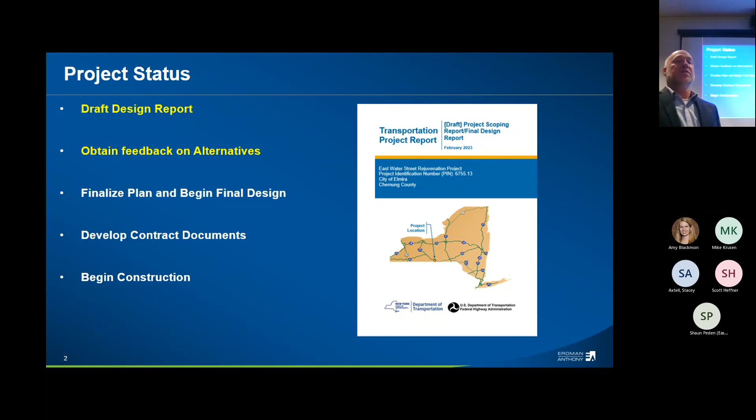So what are our project objectives? What do we want to do as part of it? A key part of that design report and that preliminary design is to improve the pedestrian facilities and improve the safety of pedestrian, bicycle, and motor vehicle traffic. Obviously safety is a big thing with everything that we look at, and the city wants to make sure it's a safe corridor for everyone that uses it.

Improve the condition of traffic control devices, signs, pavement markings. Again, that goes into the safety of it, how we want to protect that roadway for everyone, and make it more of a complete street for everyone that uses it.

Improve the landscaping and aesthetics of the corridor, and continue that community identity we have from West Water Street, from the cultural connector on Main Street. So all those different projects kind of make a cohesive look throughout the city. And then provide a pavement surface that increases the service life and rideability of East Water.

Over the years, it just gets to a point where you can't just do Band-Aids to the road anymore. You really have to do a full depth. So we're looking at what the different options are for the pavement, but we definitely want to make it long lasting, kind of get in and get out and not have to go back there for a while, other than just routine maintenance type activities.

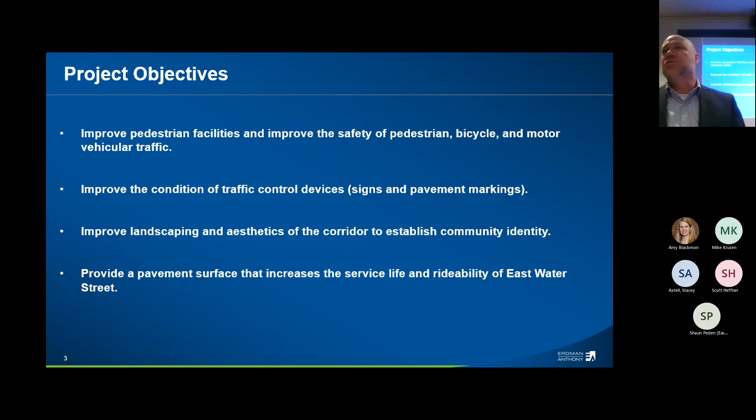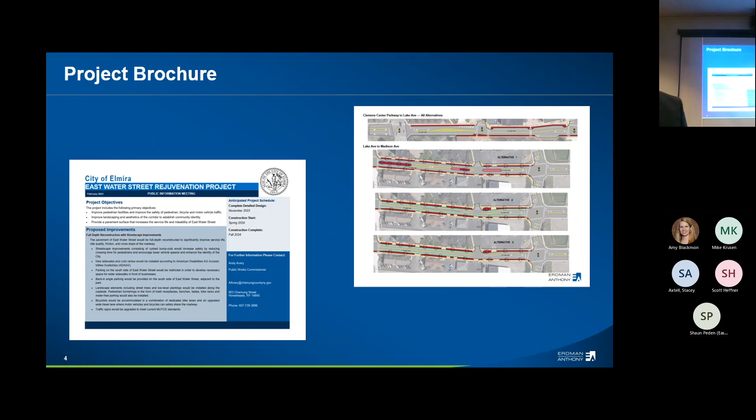So there's a project brochure. I don't know if everybody's grabbed it, but I invite you to grab those. I'll admit, as much quality control as we have, sometimes there's some gaps, and we did see that there's Lake Ave there instead of Lake Street, so I apologize for that. But there's a lot of good information, questions you can ask later. A lot of the facts of the project are included, as well as the three different alternatives that we're looking at.

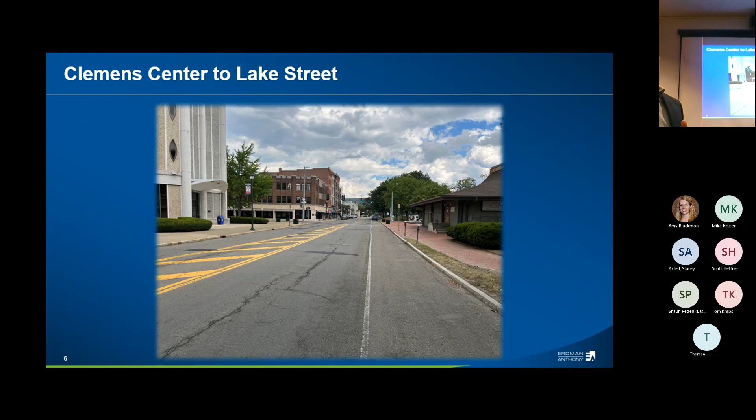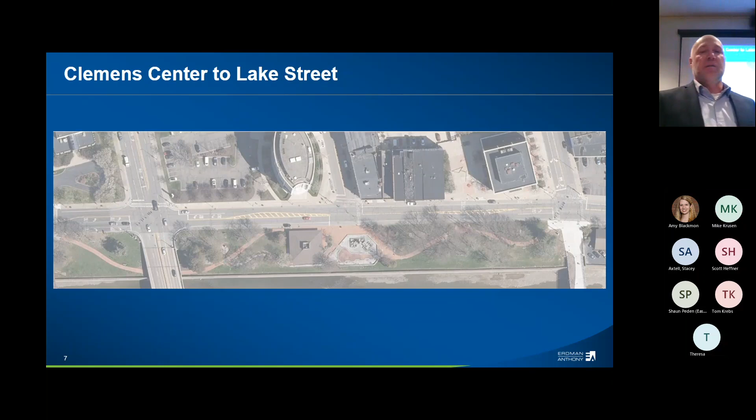So looking at it, we kind of looked at different segments, because Clemens to Lake, that section is the same for all three alternatives. So it's kind of the existing corridor. Looking at it from an aerial view, that's how we have the drawings presented in the back. I'm going to go back and forth a little bit to show what our proposed alternative looks like.

You can see what we added along most of the section, anywhere there's sidewalk, we added that stamped concrete look, or an offset in the snow storage area. That provides some aesthetics, but also provides a buffer area between the sidewalk and the curbing, and an opportunity for landscaping in some areas, as needed or desired.

Then also, if you look, we include a bump out in some locations. What that does is reduce the distance people have to cross the road, making it quite a bit safer. It also puts people out past where vehicles are parked, so there's a lot more visibility. It also slows traffic down as the road narrows—it's intuitive to drivers to slow down, so it has that traffic calming effect.

All of these include curb ramps to make it accessible with ADA, and accessible to anyone with disabilities. You'll see we added some sidewalk space on the north side of the road. We gained that basically by moving the parking in this one area, but we compensated by adding back in parking as you get closer to Lake Street.

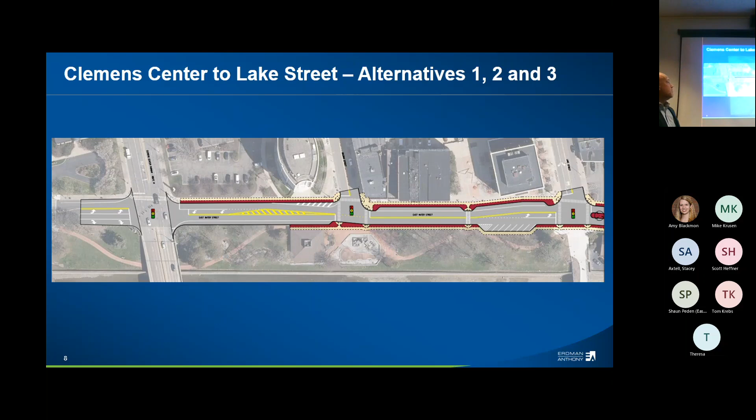So the second section, from Lake Street to Madison—you can see this area is pretty open, a lot of pavement, asphalt, and concrete. So there's a desire to make it a bit more of a gateway into the city. Looking at it in plan, this will be important as we move on. There's lots of off-street parking through this section, and really not too much parking happening on the street through that area.

So the thought was to put a flush island in that area so people could traverse over it. It's also kind of a visual barrier—not really where you want to drive, but you can go over it to get to those driveways. You can also see some bump outs on Lake Street. This alternative has what's called a shared use lane, basically a 14-foot wide travel lane that accommodates both vehicles and bicyclists.

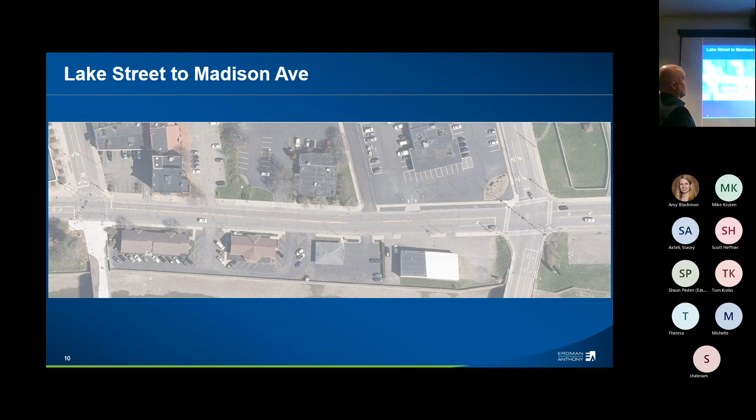So the second alternative is very similar, but without the island. We would add a dedicated bike lane in this scenario, all the way between Lake and Madison. It's a 5-foot wide bike lane adjacent to the curb, between the curb and the travel lane. In this case, the travel lane would just be a typical 12-foot wide lane.

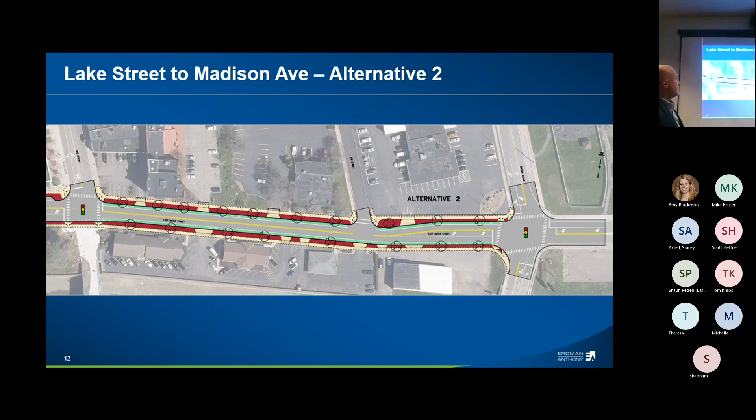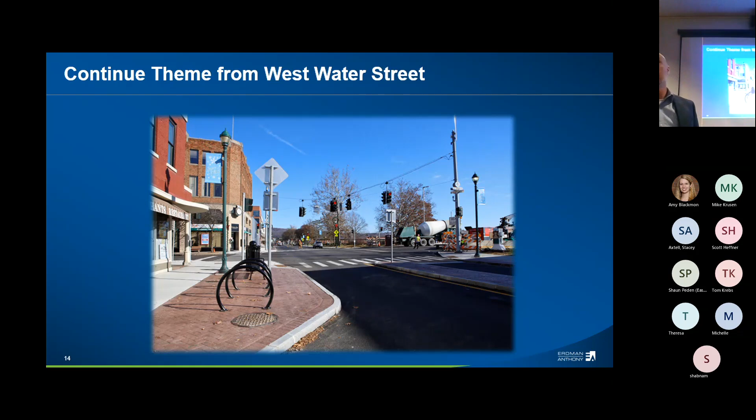So I mentioned we really want to continue that theme—the same kind of stamped concrete, same sidewalk amenities throughout the corridor, to give a consistent look overall.

As far as the schedule of the project, we've had scoping approval, so Erdman Anthony was brought on board sometime in the fall. We started preliminary design, looking at different alternatives. We anticipate design approval sometime around June of this year, which gives us the go-ahead to start final design and contract plans to get a contractor on board. We'd start construction about a year from now, and anticipate completion by the end of 2024.

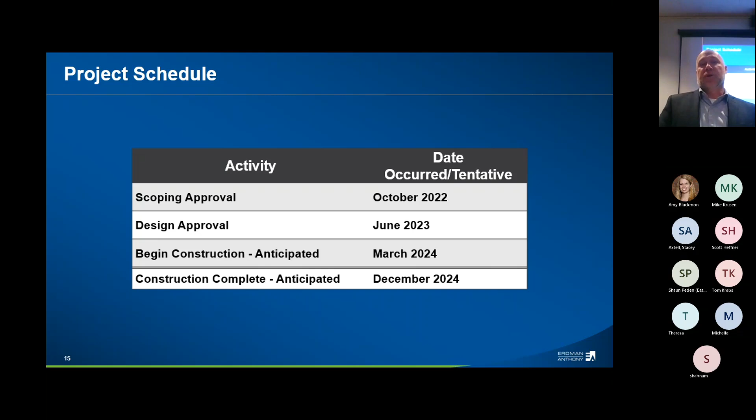So that's really just a basic concept of what we have developed. We definitely want to open it up to questions and comments as you walk around the corridor. I'm not going to take questions right now, but we really invite you to get up, look at what we have, and then come approach us with any questions. Thank you.